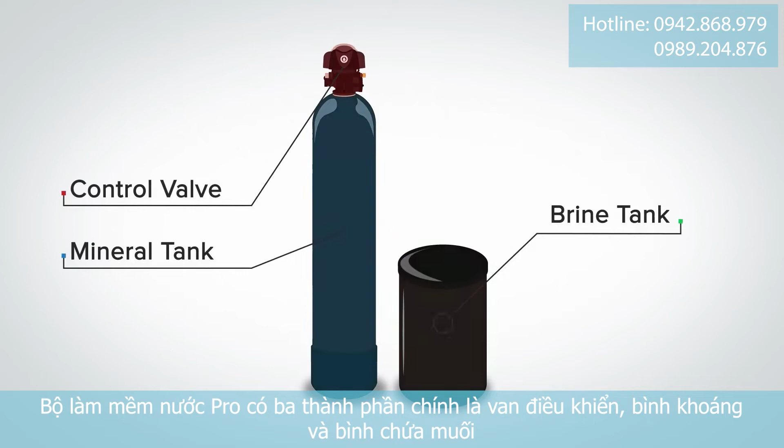The Pro water softener has three main components: the control valve, the mineral tank, and the brine tank. The control valve directs the flow of the water within the system, and in the case of the Drop control valve, it provides the patented ability to detect excess water use through its built-in water meter and the capability to remotely shut off your water or bypass the treatment through its unique pro-quality piston design.

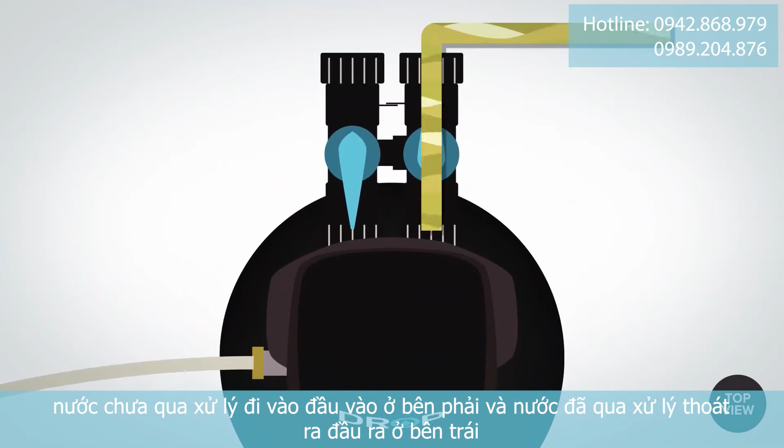Untreated water enters the inlet on the right, and treated water exits the outlet on the left. Contaminants are flushed from the system to a drain from the smaller outlet, also on the left side of the valve. Under the control valve is the media tank. Inside the media tank is a tube that runs to the bottom of the tank called the distributor tube. At the bottom of the distributor tube is an innovative plate distributor.

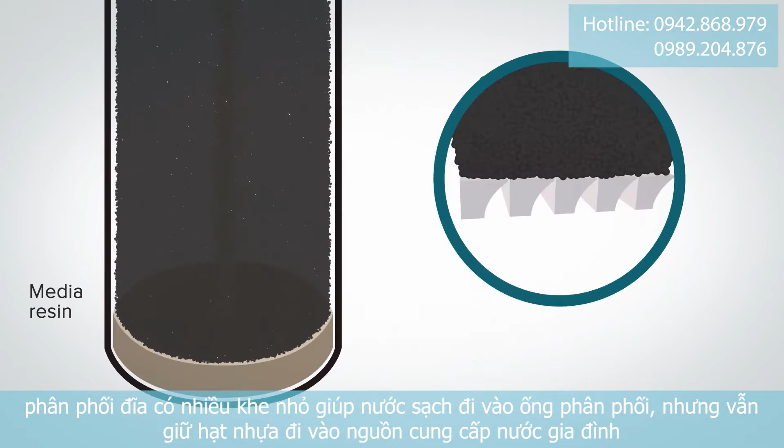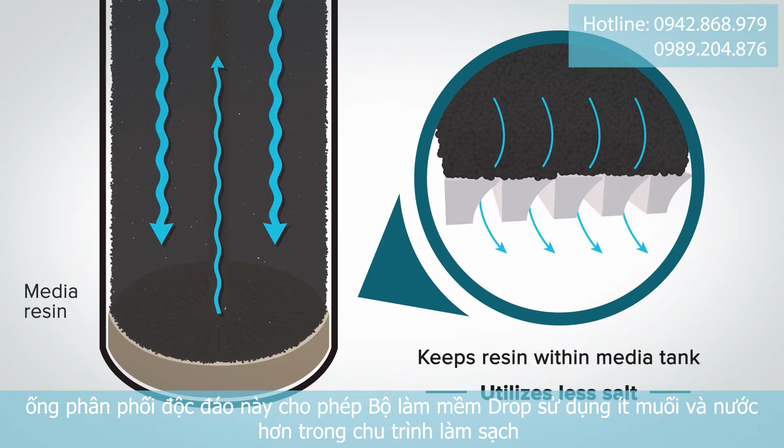The plate distributor has many small slits that allow the clean water to enter the distributor tube, but keeps the resin from entering the home water supply. This unique distributor enables Drop softeners to use less salt and water during the cleaning cycle. The final element of the mineral tank is the ion exchange resin. The resin is what removes the hardness from the water. There are several brands of resin available, but we choose to use Aldex 800 because of its long life, its high efficiency, and because it's made 100% in North America.

Connecting the softener control valve to the brine tank is the brine line. This tube has two functions. It's used to draw the brine out of the brine tank, and it's also used to refill the brine tank for future regeneration. The final component is the brine tank. The brine tank is where salt is added to the system.

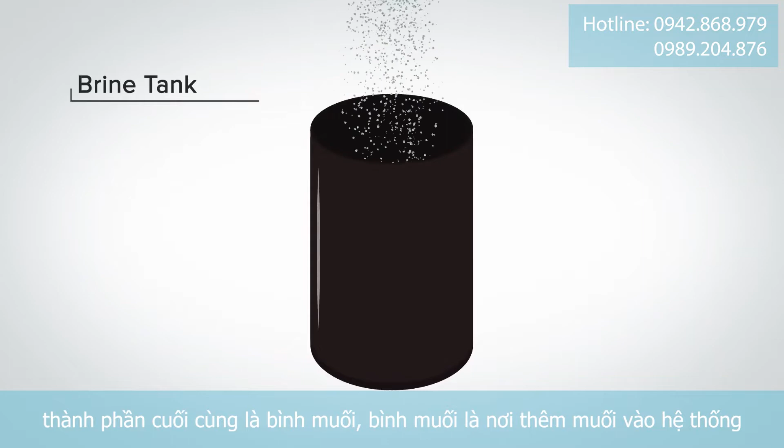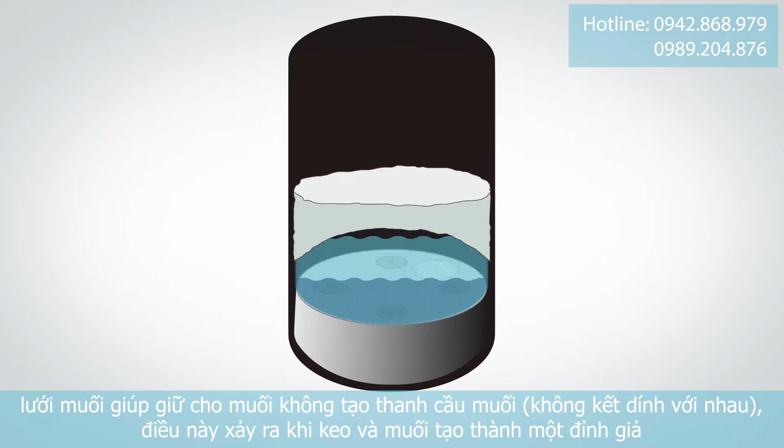All Drop brine tanks include a salt grid at the bottom of the tank. The salt grid helps to keep the salt from bridging. This happens when the glue in the salt forms a false top. When bridging occurs, you might look in the brine tank to see it looks full of salt, leading you to think the system has not been using salt.

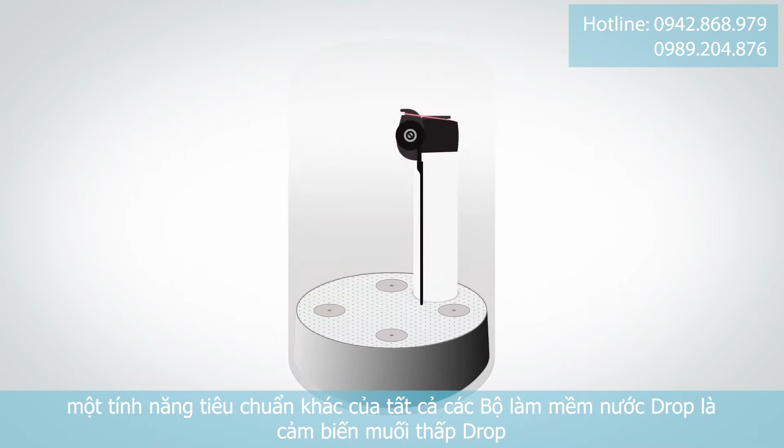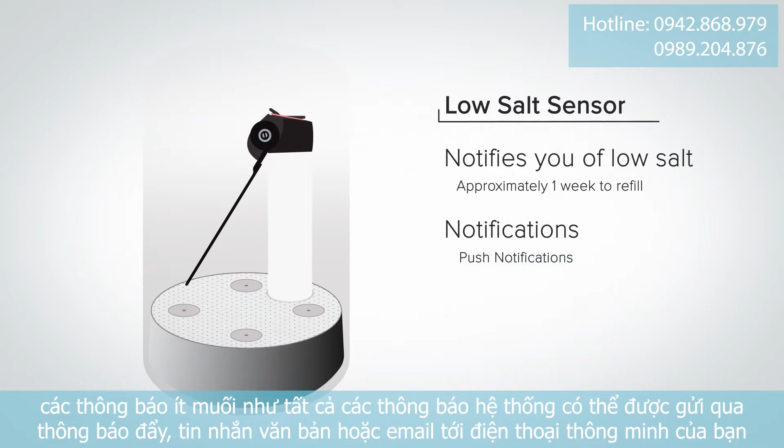Another standard feature of all Drop water softeners is the Drop low salt sensor. This sensor lets you know when salt has fallen below a minimum level before you run completely out, so you have a week or two to get more salt. Low salt notifications, like all system notifications, can be sent via push notifications to your smartphone, text messages, or email.

Now that you have seen the elements, it's time to see how it works. By following the arrows, you'll see the process starts with raw water entering the system. The water is quickly diverted down into the resin. This starts the softening process. Calcium and magnesium are attached to the resin beads as the water passes through. By the time the water reaches the bottom of the tank, it's been softened. The softened water then flows up through the center distributor tube and out to the home.

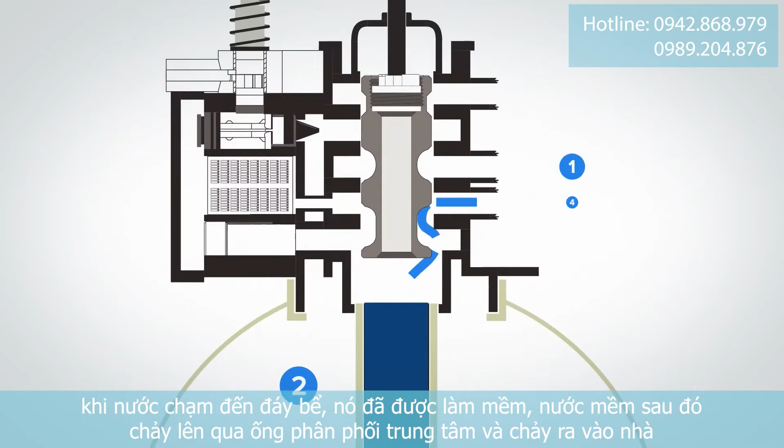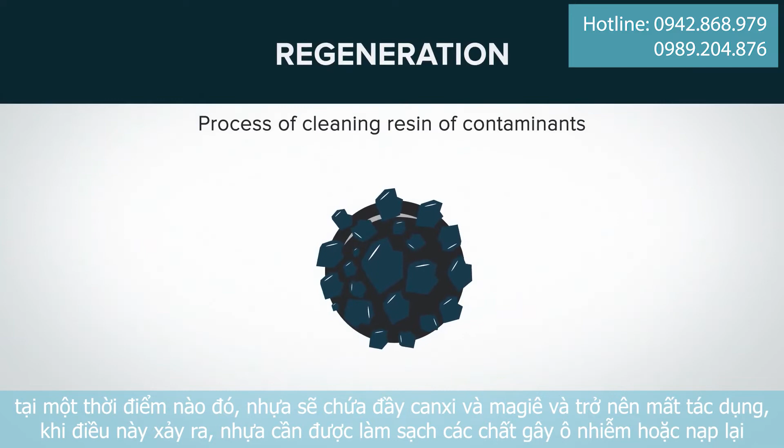At some point, the resin will become full of calcium and magnesium and become ineffective. When this happens, the resin needs to be cleaned of contaminants or recharged. We do this with a process called regeneration. There are 4 steps to regeneration in a Drop water softening system.

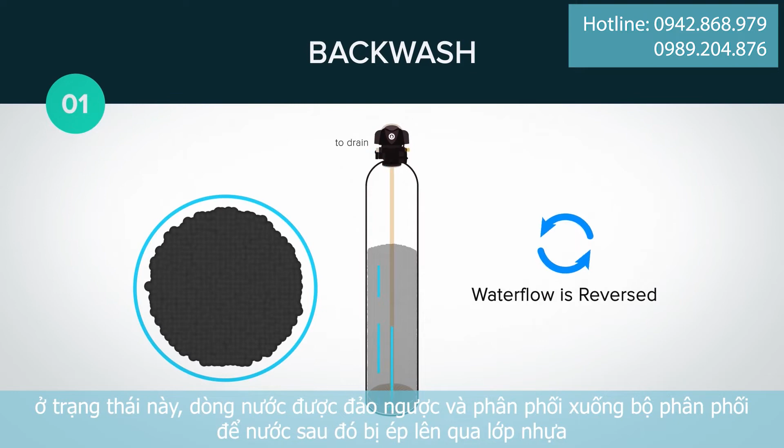Step 1 is backwash. This loosens or expands the resin. In this state, water flow is reversed and distributed down the distributor tube. The water is then forced up through the resin bed. As the water pushes up through the bed, the resin expands and the plate distributor creates a swirling action.

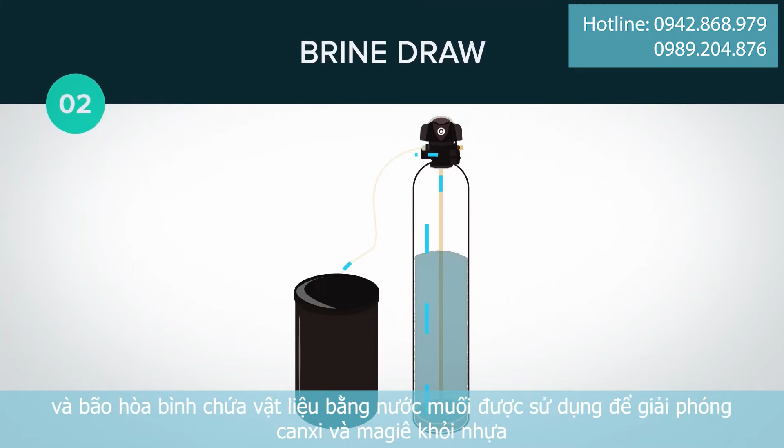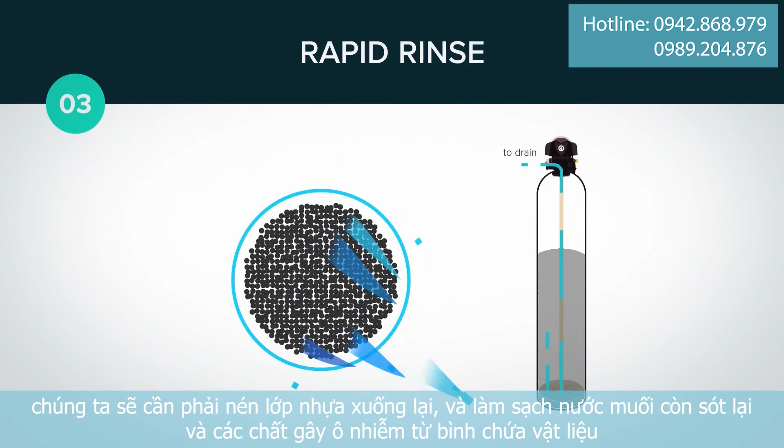Step 2 is brine draw. This pulls the brine from the brine tank and saturates the media tank with brine that is used to release the calcium and magnesium from the resin. Now with the media tank full of dissolved salt water, it's time for step 3, rapid rinse. Since our resin bed is still expanded, we will need to compress the bed back down and rinse the residual brine water and contaminants from the media tank.

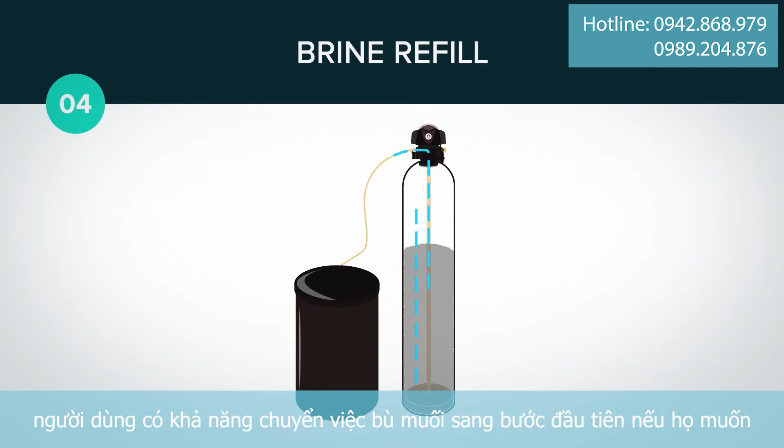Step 4 is brine refill. This completes the process of regeneration and puts water back in the brine tank so it can dissolve the salt into a brine solution to regenerate the resin in the future. Users do have the ability to move brine refill to the first step if they desire.

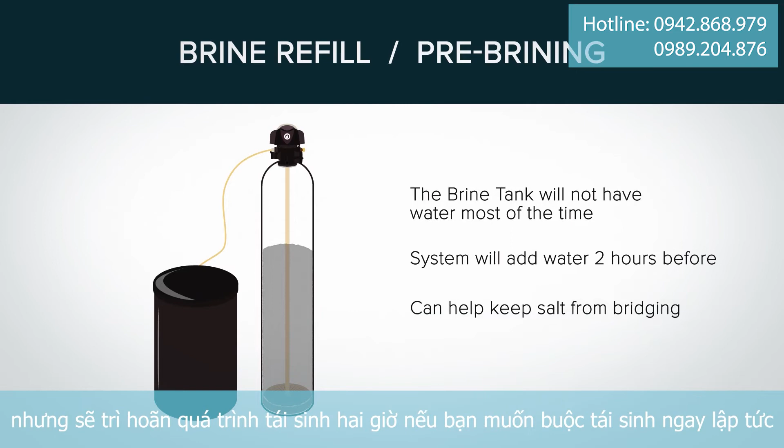This is called pre-brining. And if this option is selected, the brine tank will not have any water in it most of the time. When a regeneration is required, the system will add water to the brine tank about 2 hours before the process begins to allow the water to dissolve the salt into a brine solution. Pre-brining can help keep the salt in the brine tank from bridging, but will delay the regeneration process by 2 hours if you ever want to force an immediate regeneration.

In addition to all the benefits of a premium water softener, the Drop Pro water softener has additional benefits that are not available in any other water softeners in the world. Drop softeners have the patented ability to shut off water flow to the home. This puts the ability to turn your water off or back on in the palm of your hand with the Drop Connect app. Even better, when the meter on the softener valve or an optional Drop leak detector senses a problem with your home, the Drop softener will automatically respond by turning off your water and notifying you of the issue.

Another unique feature offered in Drop softeners is the ability to remotely bypass the treatment. If you happen to be outside watering the garden and don't want to waste treated water, turning off treatment is as simple as opening the Drop app and touching a button.

When you buy a Drop Pro water softener, you are installing a product in your home that is part of an ever-expanding ecosystem of water management products designed to work together in harmony. All Drop products are controlled by the Drop Hub, which is the brains of the system and can coordinate hundreds of devices within the home while also connecting your system to the cloud for remote access.

With a Drop Pro water softener, you will be in total control of your water system and be able to monitor your water activity from anywhere. If someone leaves a garden hose running or you have a malfunctioning toilet, you'll know it. The Drop Pro water softener provides everything you need to improve your water quality, protect your home from costly leaks, and conserve water, which is great for the environment and saves you money.